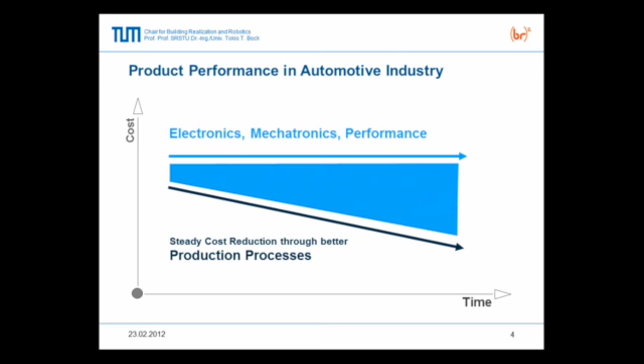The process thinking, I think, is very important, because normally architects and designers mostly have a product thinking. Sometimes we leave the process up to the civil engineers, the construction managers, or to the industry, which is not good in a way. But I think now we have chances to take the whole kind of total approach back, like the former master builders, maybe because of this new technology available.

And this input, I think, is very important to do the design work. So I have some kind of reverse engineering approach, looking at the end and then trying to design the product.

Tomorrow I'm going to show a little bit more about this production technologies. Now, because of the actual problems we have—not so much in the States, but in European societies, East and West Europe, and also some Asian societies like Korea and Japan—we are aging quite fast. So I think the process thinking might get into the building by itself. Maybe you know the movie Transformers, so maybe the building becomes like a transformer in the future.

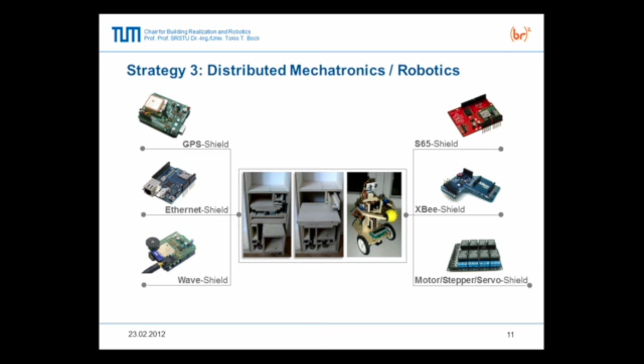So actually here also this thick wall has everything inbuilt. It has a toilet inbuilt, a cooking place inbuilt, a shower inbuilt, a refrigerator inbuilt, and it all slides out whenever you need it.

And I think in the future, what we are teaching our students in Munich is the traditional building structure, all the services, the appliances, the envelopes, and so on. And I think in the future we have to teach more about other systems which become active subsystems, like mechatronic systems, microelectronics, and microsystem technology, and these ubiquitous technologies which can permeate into the building.

But nobody is actually teaching it, or I'm not aware of courses, so we are trying to teach it now in our master's course.

What else is important - I also got inspiration from the United States, from Taylor, and one of his partners was Christine Frederick. She did the same as Taylor did with the one best way - Taylor, the one who inspired Henry Ford, Winslow Taylor. The One Best Way was his famous book.

Christine Frederick was a partner of Taylor, and she applied his thinking to the kitchen. She analyzed all the kitchen work and rationalized or revolutionized the American kitchen. There was an Austrian woman who worked in Germany, came to New York and copied Christine Frederick's idea, brought it back to Frankfurt, Germany, and developed the Frankfurter kitchen.

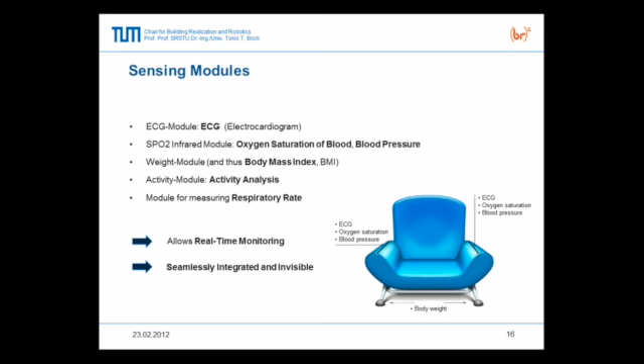It can give an alarm or some advice if something goes wrong. So while you're sitting on the chair, the data are measured. And why we chose chairs - because old people like to watch TV, they have their favorite chair, so we can put the sensors into the chair.

The next prototype addresses the problem that they shouldn't sit too much, because then they get lazy, and the less old people move, the worse the problem. So I had this idea, inspired by the Transformers - called in Japanese Gundam or Gattai - to transform the chair into a kind of exercise machine.

So here you see you can do exercises. Then the chair will recommend that you should do some exercise now, don't become too lazy. And of course, everything is connected to get the data and send it to the doctor.

Also, this is pretty important for countryside places - I don't know the situation here in the States, but in Germany, in remote villages, there are not many medical personnel, and nobody wants to be a doctor, or physician, there.

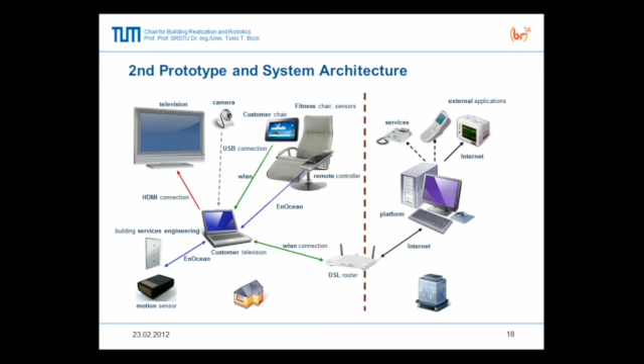Physician? Yeah, in the countryside, because it's not very attractive. If I live in Munich, walking from my apartment to the university, I can pass by all my dentists and optometrists, no problem. But when I go back to the countryside, where about 280 people live in a small village, I have to travel half an hour or more to find a hospital. So this could also be a solution for telemedicine in the future, connected to the internet.

And then, of course, we do real usability tests, not only with young people but also with old people. Here you see the first prototype of the chair that will transform into an exercise machine. First we're trying to do the rowing. We incorporated people from the medical faculty and the sports faculty to study the best ergonomic movements for the elderly, and they advise us how to do it.

Another project is together with Italians, where the problem is, of course, if you build a new building, you can already consider all these things. But the existing building stock does not have this technology. So we are developing a kind of modular system which you can transplant into existing buildings. It has to be very small, so you can bring it into even an old farmhouse and embed it into existing buildings or apartments.

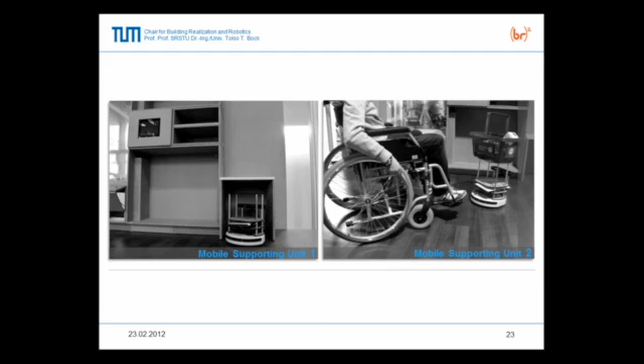Okay, here you see again some devices. This one travels out to help bring in the shopping bags. And this is the first prototype, here for one or two seats, whatever. This part flips out, helping you take off your boots. And all this technology, which you also find in some robotic devices, is now separated into this device, helping to communicate and so on.

Whatever you need, depending on your problem or physical challenge, it's a modular structure. Physically, or also the program, what this furniture can do for you can be extended or expanded. It can be adjusted to any kind of corner layout. We analyzed several hundred buildings and found a modular coordination where it can fit in and adjust to many existing buildings.

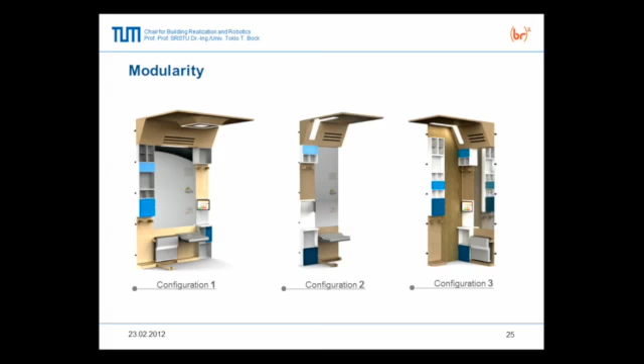Another project we are starting this year is about mobility. Mobility is a big problem, especially the interface. For example, we have devices where people can be lifted out from the bed, and they can move on to the toilet. But then at the interface is always the problem.

From this lifting device to the toilet or into the bathtub, or at the entrance shift over to the staircase lift, and things like this - always the interchange is the problem. Or when you are down there at the entrance of your apartment, how you get into the car, for example. All these interfaces are not solved, and here we're trying to solve it.

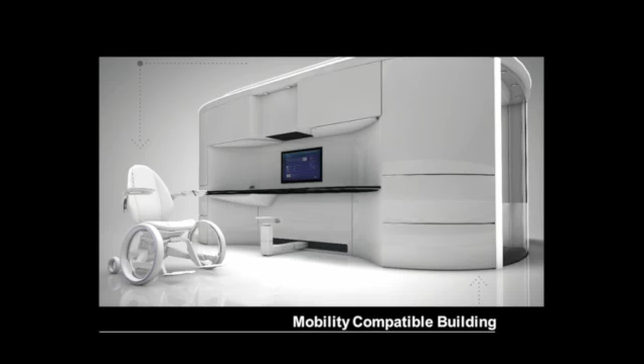Here you see the kitchen part and how you can shift over. You drive it in here, and you just slide over, and then you can use your kitchen, and this brings you to the right position, whether you need to wash dishes here or cook something here. Here you see it again on top, how this toilet works, like a motorcycle.

Yeah, I like this idea. We can discuss later.

So this is the company we are doing the new wheelchair together with. It's a company which also provides lots of devices and appliances for hospitals. It's important to have companies which have the competence, because if you develop something and show it to a medical doctor, they know exactly what company can do good products, and this is a major hospital equipment supplier.

Okay, and here we do the motion analysis. Again, time and motion - this is what Taylor did, you know, Taylor, Winslow and Christine Frederick. And now we do it for our apartments, to design for the independent lifestyle of elderly people.

Or here's some other development where we had some rails on the ceiling. Lots of accidents happen, for example, when old people get up at night and they don't find a light switch, and then they stumble and fall over. And then maybe if they live by themselves, after a couple of days you realize somebody is not moving in the apartment, you get in, and people are already dead.

So this device detects - of course, not with a camera, people don't want to be watched like Big Brother - but with infrared, and then it can show you the way where you want to go, and it can also help you get up. It's all suspended from the ceiling.

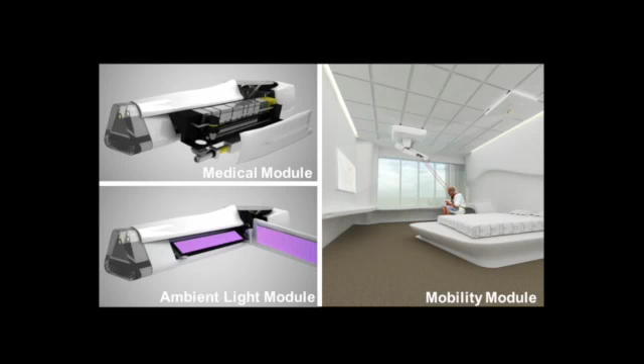Another project is a little bit more with typical industrial robot kinematics, but in this case it was the robot which had been developed for the Space Lab mission D2 in the 90s. It's a lightweight robot made out of carbon fiber, but a little bit expensive, about maybe $120,000. It's lightweight, so it only weighs 15 kilograms, and it can handle about 10 kilograms.

Because it's lightweight, you can put it anywhere on the furniture to help you in the kitchen. But actually, I think this kinematic is not so well suited for construction applications or building applications. But anyhow, we have this project with this company, so we do it.

And here you see what we are actually setting up now in our laboratory. This is a kind of testing device, modular. Everything is modular, so you can customize whatever the client needs or what really is demanded. So we can customize the kitchen, the bathroom, the toilet, the living room, the bedroom, whatsoever.

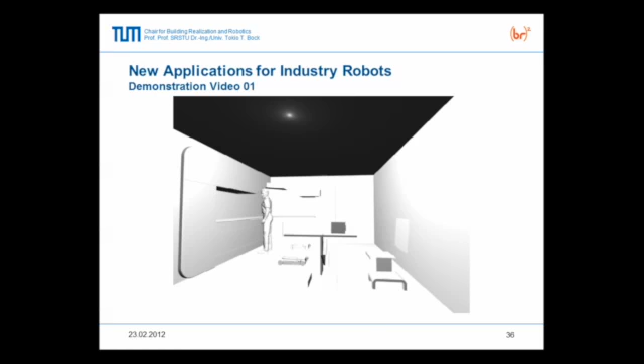Also, the setup, I can show you later, is not a typical construction industry setup. I used sections from mechanical engineering, so I can change the whole space in 3 dimensions.

Yeah, here in the back you see the kind of sections we are using. So I can attach here, theoretically, a linear drive, so I can make the wall perform something. And it's a raised floor - actually, I can do something from below.

We have one project where suddenly the things you need appear around you when you need it, or from the ceiling. So it's a very three-dimensionally changeable space.

Okay, and then the kitchen. Here we got some inspiration from McDonald's, because they're very, very good at how they organize their work - not about the food, but the systematic approach of how they do it. It's a little bit from aircraft as well.

I refer a lot to airplanes because I like airplanes, I'm sorry. So, you know, when they bring you the food on an airplane, everything is very compact - how they heat it up, how they serve it to you.

And this kind of notion, McDonald's notion, plus the business model of McDonald's, where we supply the person - because the problem is sometimes elderly people don't eat properly, they don't drink properly, they have the wrong minerals and vitamins. So everything will be supplied for them, just like what they need to have good nutrition value.

Okay, and then here this kitchen is changing as well, because it's always difficult if you sit in a wheelchair to move around in a wheelchair.

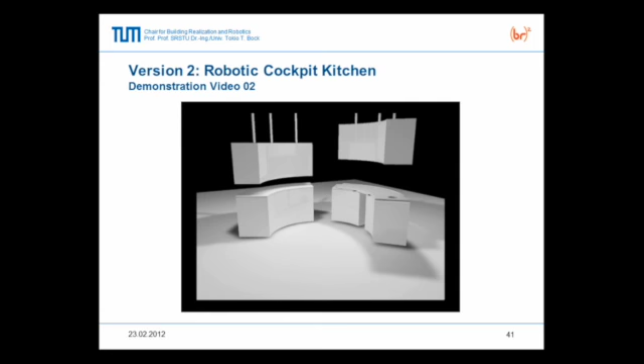So the furniture becomes, or later the whole building becomes like a transformer, in my opinion.

This would also be good because the investment in construction building is very high. In Germany, every second euro goes into the built environment, including infrastructure. This means huge investment, and I think in the future we have to deal differently. We cannot scrap and build. We have to find different solutions.

This is the one I said where we took some ideas from the aircraft. It's not rectangular like in the airplanes, because I thought it's kind of interesting to have this round kitchen as an island solution, and the other one I showed you before, you got into this round solution. So we're trying all different kinds of solutions.

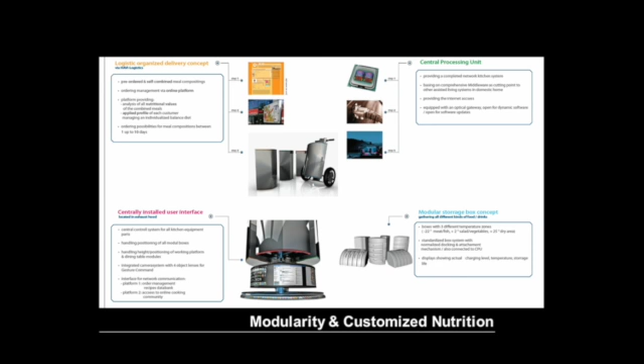Okay, so I think I'm almost through. This is the one inspired by Christine Frederick, and this is what we are trying to do today. The idea is to have these customized services and environment, whatever the people need, whether it's to allow their independent lifestyle. Okay, thank you very much.

Thank you, Thomas, for this preview of aging. I already feel a little bit better about the prospects. But I think there'll be lots of questions. It brings up so many associations, building as a machine, human-centered design, many issues. We'll leave questions to the end. I also want to mention that tomorrow from noon to 1 there'll be another presentation by Thomas Bock about the work in construction automation, the prefabrication of components, and the construction automation systems for high-rise buildings. That'll be in room 124.

So let me introduce our next speaker. She's Rivka Oxman, associate professor at the Technion at Haifa, Israel, where she received a bachelor, a master, and a doctoral degree. Her work explores models of design thinking and design computation from a conceptual and theoretical perspective. She promotes design and design practice as a form of research. Her work has been published extensively in both scientific and other journals, and she's given keynotes at venues such as SIGRADI, CAAD Futures, CAADRIA, etc. Rivka Oxman is a fellow of the Design Research Society, and recently co-authored the architectural design issue entitled 'The New Structuralism: Design, Engineering and Architectural Technologies.' This year, she is a visiting scholar at the GSD, working on new projects. Please welcome Rivka Oxman.

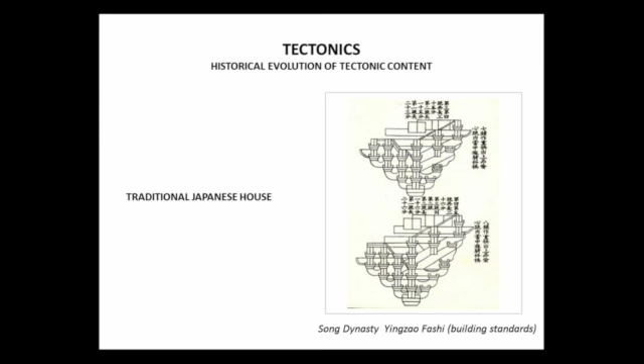In historical periods, advanced construction tradition encompasses the structural system, building standards, and the construction processes which are closely integrated. The material systems are gradually transformed into formal systems that directly express both the material origin and the construction process.

Frank Gehry's Bilbao is considered to be an early digital tectonics. In the early digital age, in buildings such as Guggenheim Bilbao, the fundamental methodological difference is that the shapes were produced as individual forms and lacked, at the beginning, an inner integrated link with either structure or material. The link became stronger later.

Gaudi's work is considered a canonic example which introduced experimental analogical methods of form finding in design. You can consider that as an early informed tectonics.

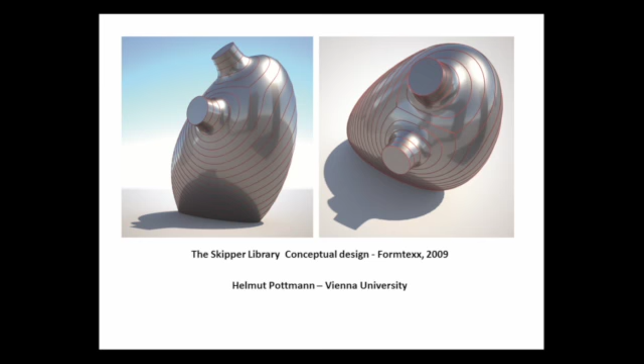The Skipper library conceptual design was done by Formtexx in 2009. In this project, Helmut Pottmann from Vienna developed a construction-aware digital design environment that incorporates knowledge of the material used, panel types, and panel geometry options. This way, it kept the information flow along the project development.

Helmut Pottmann is currently developing rationalization techniques to support informed processes, providing construction-aware design tools and enabling a completely digital workflow from design conception to manufacturing.

I believe he worked with Zaha Hadid on the funicular station in Austria, where Bollinger and Grohmann, design to production, were doing the construction and the fabrication.

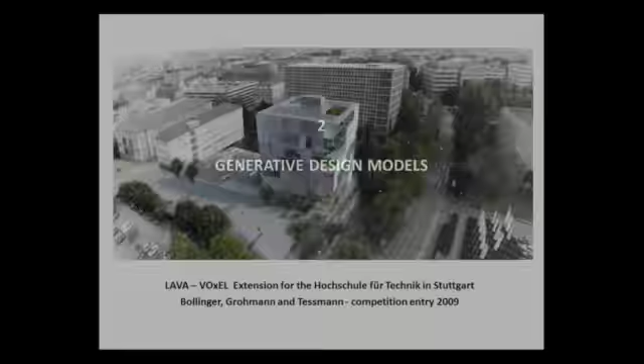The second principle is getting the flow by using a computational, in this case generative evolutionary, design model. The Lava voxel extension project by Klaus Bollinger, Manfred Grohmann, and Oliver Tessmann illustrates both the structural and formal principles in the conceptual model of square-edge sponge configuration.

The project is based on a 3-dimensional spatial continuum that provides close interlocking of the same elements for spatial and structural organization. The interdependency between shape and structure is maintained by using an element which shares the formal expression and the structural attributes.

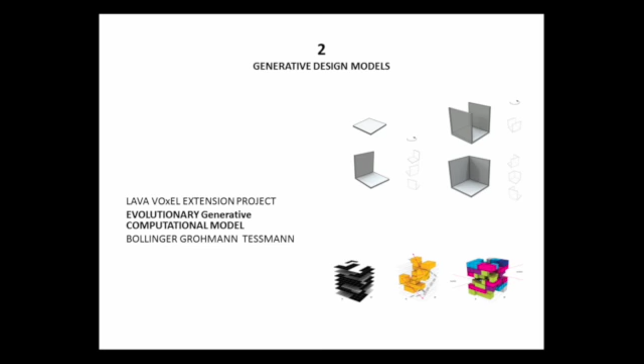The system properties are not defined by individual elements. They emerge from an intricately informed generative evolutionary model without any top-down control. The interdependency between sets of elements is hardly predicted in this case. The structural performance of the configurations becomes the fitness criteria in this evolutionary process.

The third example, the third model, is related to information flow achieved from design to code and manufacturing. And here you're probably quite aware of the work done in your own institute.

By Professor Martin Bechthold, in which robotic bending work of individual metal components, by Martin Bechthold, GSD Harvard University, and his students, illustrates the role of directed information flow from design model to code generator to robotic manipulation. Both design and robotic fabrication systems are informed in a bottom-up fashion by local processes and control.

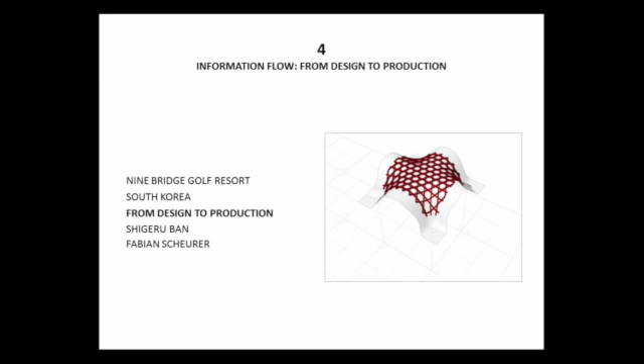In this project, woven timber girders represent craft-like tectonics. The canopy was composed of woven timber girder elements assembled from detailed 3,500 glue-lam intricate prefabrication segments. Intersecting girders were fabricated by CNC machine, as you see here, ready for production.

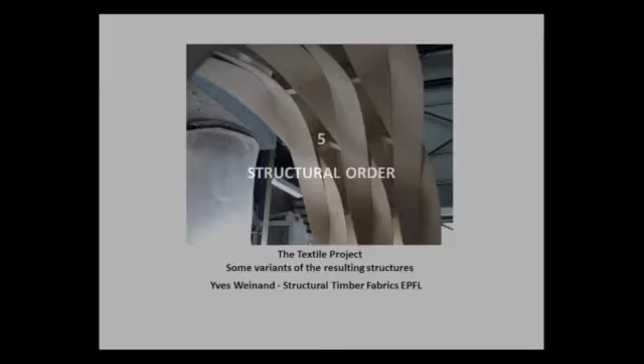The fifth concept is the selecting of structural order. Construction demonstrates an interdisciplinary approach in which material first informs the structure and the form. So in this project, instead of working form, structure, material, the work started with material, which then produced an emergence principle of structure, which creates the form. This is seen in the work of Yves Weinand from EPFL Lausanne, termed the textile module, applying textile principles to the context of timber.

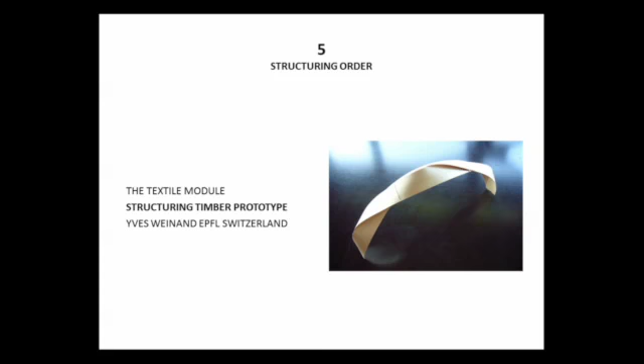By twisting a material component, in this case a timber sheet, into a stiffened structural component form, a structural principle emerges. So here we get a structural principle which is not usually demonstrated by timber. The component is then assembled into a fabric-like woven structure.

The sixth concept, the sixth model, talks about digital materiality. I guess all of you know these people, Gramazio and Kohler from ETH. In the following case studies, bricks that have geometrical attributes and constructional logic are encoded digitally as a particular material system.

Formulating and scripting the logic of a design system as the interaction between human and robotic machine, including the geometric form, the structural elements of material components, and their assembly logic, in a single mode of design, becomes the basis for the definition of digital materiality.

Digital design code of complex material instructions can now drive design production in robotic bricklaying. I just heard they are moving now to another material, a timber material, and we'll see what's going on.

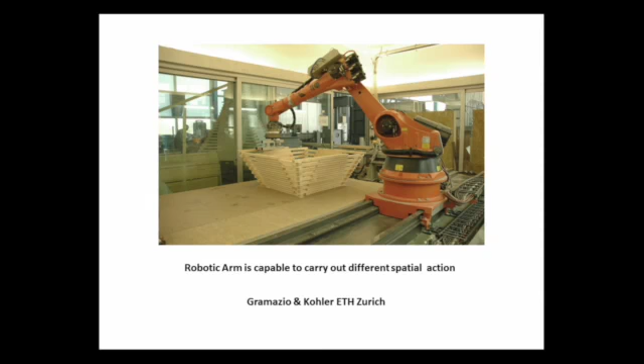Digital materiality, as defined by them, is informed tectonics via robotic technology, encoding the geometry of material components and their assembling logic. Informed tectonics through coded variations in experimentation with digital tectonic systems produces an infinite range of experimentations.

The last principle, last but not least, is the concept of digital material and variable properties—the digital material variable property model. In this model, variable properties of digital material are informed by performance attributes of a specific context, human or environmental. Digital material is computed and fabricated according to desired properties.

Some examples: the Beast prototype for a chaise lounge, exhibited in the Boston Museum of Science, demonstrates how variable properties of digital material can be informed by specific context. In this case, the distribution of structural fitness and distribution of the body produce the desired properties.

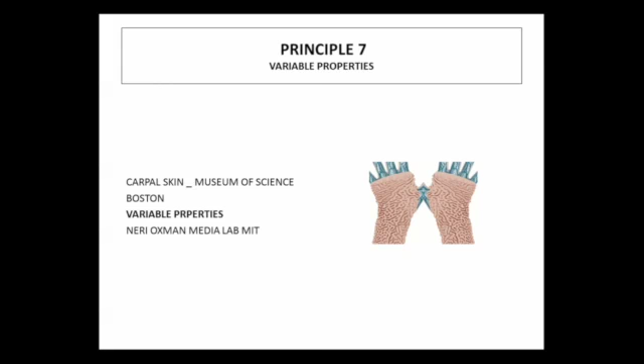Again, variable properties of digital material are informed by structural loading and the distribution of structural stiffness in the work of Neri Oxman, presented here. In this case, properties of the shape and stiffness distribution are informed by a pain map.

To summarize and conclude: today, the convergence of design, engineering, and architectural technology is breeding new material practice in experimental architecture. The term 'informed tectonics' was proposed here to represent design technology as an agent of change, looking at this shift as a synthesis of conceptual principles of spatial, structural, and material ordering integrated within the logic of materialization and the rationale of fabrication and manufacturing technologies, as a holistic model of design.

I think this field is very exciting. It changes the way we think and perceive design, and I believe it will grow from the small scale of product design and buildings, and will lead to a different and refreshed way to deal with problems in urban design and other big-scale design.

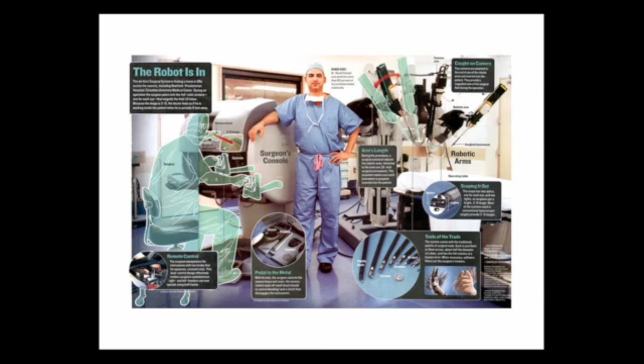I've titled this the AR Lab, and I wrote an essay not too long ago, having talked to an architect colleague of mine in New York, who said, 'Paul, I recently visited Yale, and I was very impressed with the facilities they have there—the students have access to all of these new technologies, new robotic equipment and CNC machines. And there's a real problem I see, in that these students almost are being trained as though they were, as an analogy, medical students given the latest technologies, but when they get back into actual practice, it's as if they went from this very high technology and they're given a hand drill from Home Depot.' So there's this real chasm between what's being taught in academia and what professionals are being given in actual practice. And this is a real concern of mine.

So I wrote this essay called the AR Lab, the Applied Research Lab. The premise of this essay is basically to say, how can we bridge this chasm between academia and those in practice today? I work with the AIA in New York, and I'm also now working with the AIA in Philadelphia. To be very honest with you, I'm not so enamored with the AIA as a change agent for technology—I shouldn't say that too loud because it's being recorded. But how do we bridge this?

How do we get practitioners to use this technology who don't have access to what you have in academia? And how do we bridge your transition from this wonderful world of academia into a practice where you're not disappointed, where you're not let down, where you feel that you can show those in practice what you've learned and what you're doing. So there's a very practical side to this.

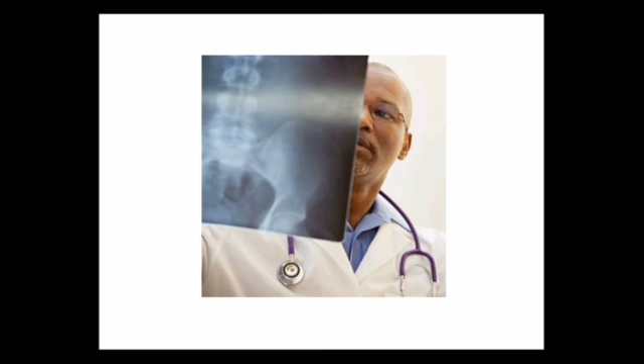So I like to think of architecture and architects as analogous in their importance to the profession of medical research and medicine itself. And I look at the surgeon or the medical practitioner and I think, well, what distinguishes the medical practitioner? It's not purely looking at a film and saying, this is the problem. It's a series of taking conditions, examining conditions and studying conditions, and then coming up not with one answer, but with a series of options, with a series of interpretations.

So we look at conditions as architects very similarly. We like to know what is the given problem, what are the given conditions, and how do we synthesize this into not just one option, but many options.

And so we have the technology that enables us in many ways to monitor what's going on. But the problem is that we're monitoring this in a post-rational manner. We're coming up with designs, we're coming up with morphology, and we're using the technology post-rationally, post-morphologically, to sustain or to validate what we've designed. It's not embedded within the design process itself.

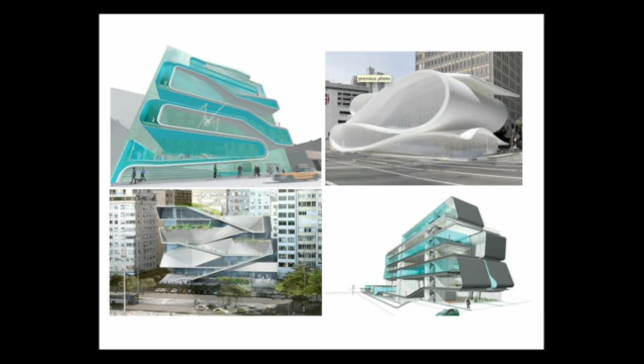Now, I'm not suggesting that we shouldn't have our heroes and we shouldn't have our authors or our auteurs, but this is a series of slides that I call separated at birth. A lot of what you see is in some ways mimicking the digital technologies, in some ways trying to epitomize the digital age. But there's an issue here, and I'll get to that as I go through these slides. So I'm not going to name names. This is by no means to denigrate these architects or their ambitions or their ideas, but it's to say that we need to go beyond what we're using the digital technology in terms of formal production.

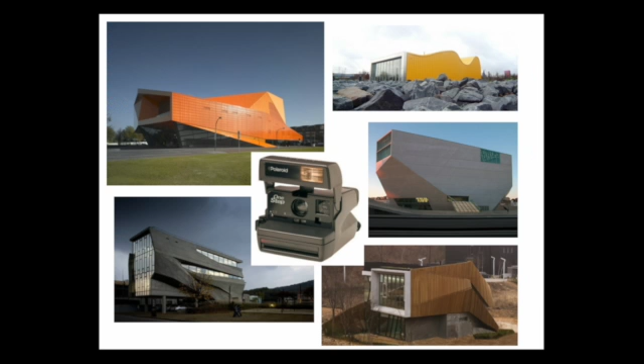So you can see here there are a variety of themes that have been generated digitally and produced digitally, and some of them are evolved from the Polaroid, and some go into an expression structurally of what exists. I certainly love what Rivka has presented as an informed, intelligent approach toward structural representation and towards structural expression. But we start to see examples of some, I can't say mimicking, but where a theme is developed and it's taken and becomes a kind of fad in some ways. We even see it in examples of the software technology companies and how they're recognizing this. But again, all of this goes toward a question of when do we begin to embed the technology into the design process itself.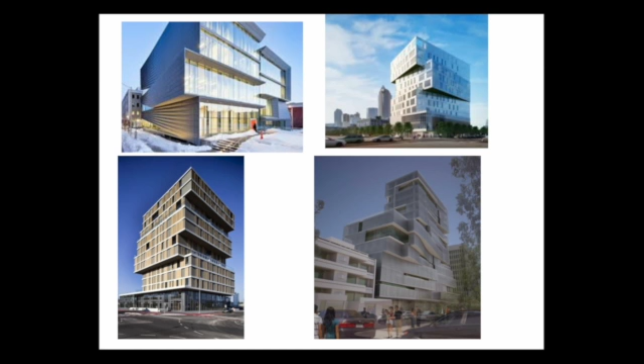And I think it's notable that Rivka, for example, has presented Gaudi and Mark Burry's examination of Gaudi, because well before the computer was brought into existence, it's clear that Gaudí had the parametric mind to understand structural integrity and structural expression, and didn't necessarily need the computer to see this. So where does the computer help us to augment some of these ideas? And especially in practice, where do we start to examine how the computer is not an answering machine, but is a means toward creating more options in less time and starting to communicate with clients in a different way than we're used to?

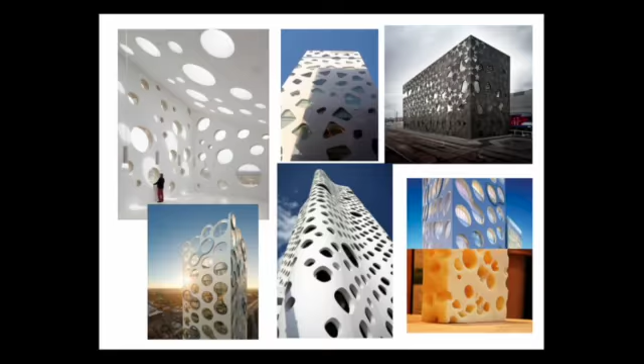A lot of the difficulties, for example with building information modeling, are starting to overturn the nature of our labor and what we produce in terms of our labor, both in the early stages of conceptual design as well as in the production of our documentation. I'm going to get into that in a second or two.

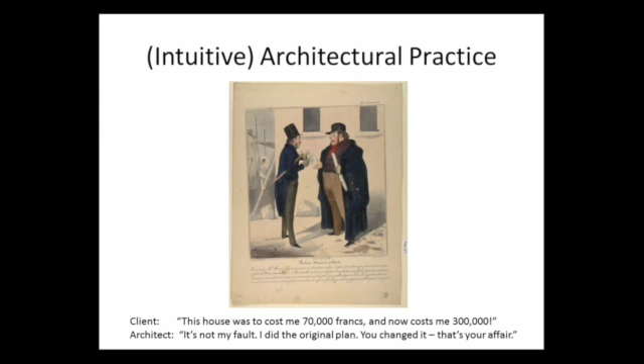But we can look at this from over a century ago, two centuries ago, and say, well, what has really changed? We're not really allowed to talk about costs, we're not really allowed to talk about means and methods, we're very afraid of our risks and our liabilities. So in terms of all the technology and our empowerment as a profession, we've really gained very little.

And so we are faced with certain situations where we're questioned in terms of our stated claims to energy performance. We have advances in other areas of neurological science and research, how we perceive things, what makes us comfortable supposedly in certain spaces, what makes us uncomfortable in certain spaces, but we don't really have a means to incorporate this into our design methodologies.

We don't have any means to simultaneously take what we're shaping and what we're looking at formally and gain any feedback, as we might on an automobile dashboard, as to how fast we're going, how quickly the engine is changing its rotation, how much fuel we have left in the gas tank. We don't have any means to simultaneously look at this in terms of our design methodology.

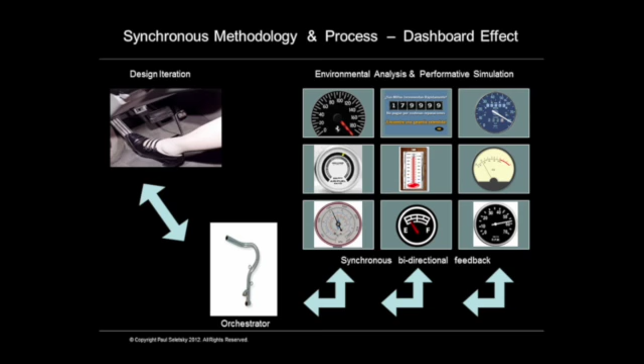We have very much an asynchronous, sequential design methodology, which again says let's come up with the shape, let's come up with the form, and then let's apply all of these engineering properties to see if the building can withstand the conditions, rather than saying maybe these conditions can inform our design morphology. So we have our idealism versus the reality, and the reality is this.

We haven't perhaps studied the industrialization of the big box stores and how they're changing the landscape and impacting our environment and shopping methods. The Apple Store is the most profitable retail venture in the world, and Steve Jobs was very reluctant to create it. But he did, and they moved forward with it.

Does it really talk about our design methodology? No, it really talks about the idea of selling one's products within a given environment and tailoring that environment toward those specific products.

Now, what things will change our way of thinking? What's happening? So we have cloud technology that we're talking about. I have an iPad. In today's New York Times, David Pogue writes about this new software company called OnLive, which is essentially streaming a Windows desktop to your iPad.

So the notion of having a singular computer at your desk will probably in 10 years be tossed by the wayside, and we'll have ubiquitous mobile devices everywhere, more computing power than we could possibly imagine through the cloud, if we use this properly, to design and to start to look at the integration of design morphology and design analysis in a simultaneous rather than a sequential manner.

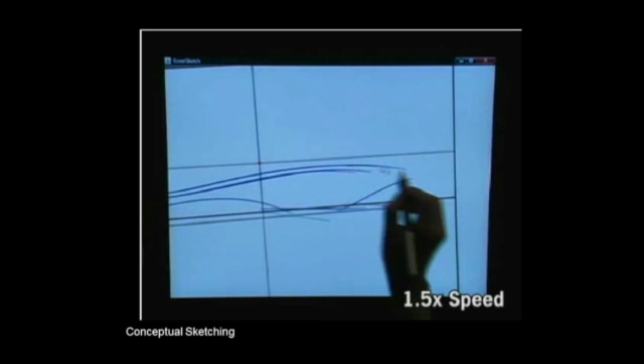I show this as an example of the chasm between those in practice and those in academia. This was developed a few years ago. It's antiquated technology, but it's mimicking what we want to do in terms of tactile feedback with regards to the pencil. There was a symposium at Yale that I believe just ended yesterday or today that we might talk about, but the whole loss of the tactile relationship between hand and eye coordination.

We're lamenting this loss, we're questioning it, and yet we haven't really talked about how the computer or digital technology can augment the way we think and the way we like to practice.

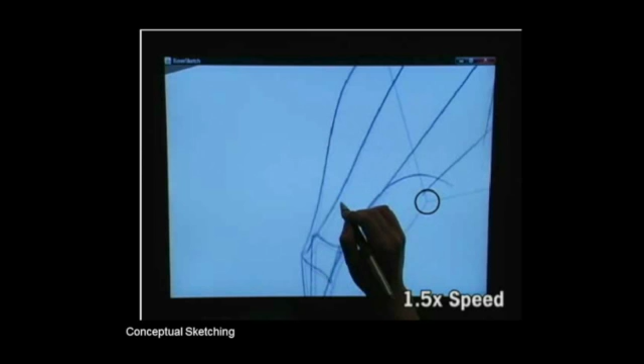In something similar to this, I will also argue there are several areas that we as a profession have not had serious discussions about. I'm not necessarily interested in a symposium on the loss of using the pencil as much as I am interested in talking about how we're going to publish our work. I believe we have a serious problem in terms of multimedia digital publication that the newspaper industries and the music industries have already faced or currently are facing, and we haven't even begun to have these discussions yet.

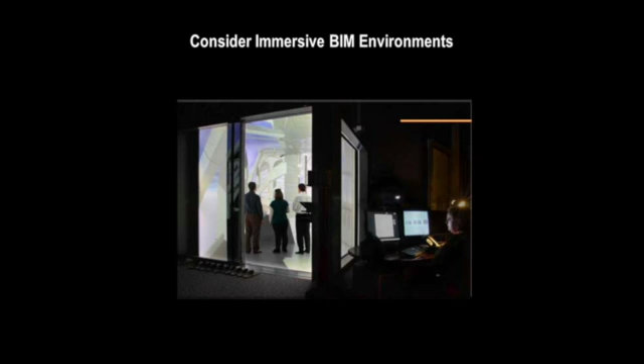We have very few tools that really start to do this. We talk of immersive environments, but here again, the immersive environments are quite expensive. Most practices cannot afford them, even an SOM or similarly large firms. So where do we begin to look at what we're designing and simulating what we're designing through the technology?

This is one video, if we could play this now.

So the idea of the tactile large screen where we can start to experiment not just with images but with text, with specifications, with a whole range of ideas.

As I mentioned, OnLive has this Microsoft emulation. Microsoft has also incorporated their touch screen into this technology. So I now have a touch surface that can do this on my iPad. This was produced by Jeff Han at NYU a number of years ago. It was shown at a TED conference to great acclaim. But if you go into any office these days, you're very unlikely to see any of this happening within the largest practices.

So the question is, is it necessary? Why don't we have it? What are we really doing with the technology? I would argue to a great extent we're doing BIM 1.0, which is basically, in terms equivalent to the automobile industry, like Henry Ford painting a horse on the Model T and saying this is what everyone wants because they're really familiar with the horse.

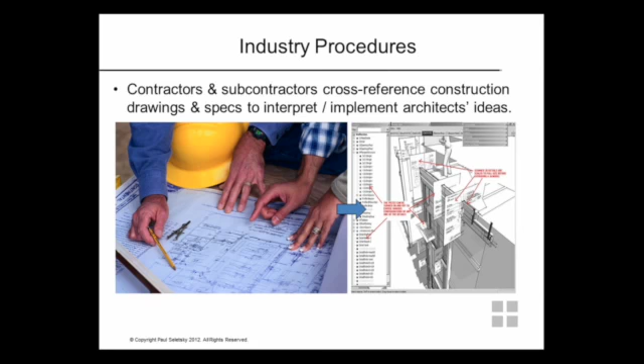Here is an example of what we do in the field, and someone's idea of how we might be able to do it better, in terms of dynamic sections which are linked to specs, the miscommunication of paper, the billions of dollars that we waste going from our bid sets to actual construction.

The fact is that we can create as embellished or as intricate a BIM model as we want, but we don't take it into an as-built form. We're relying on someone else, namely the CM, to do that, or we're demanding this as an additional service, as we rightly should, but we're very reluctant to create the as-built model from what we actually build.

We have the stacked paper effect. Here is an example of BIM 1.0.

And we're not even looking at the simplest of technologies that we take for granted today. I can track where my shoes are that I've ordered from Amazon.com, but I have no idea where my building components are relative to the project.

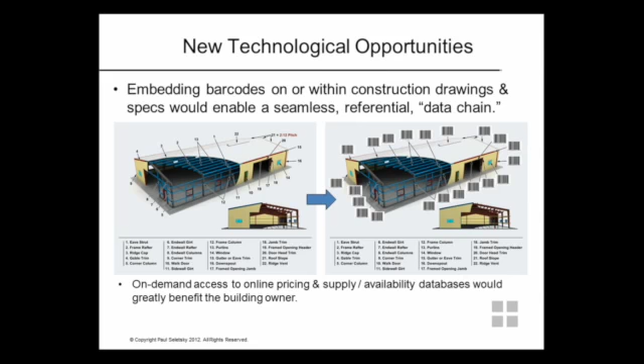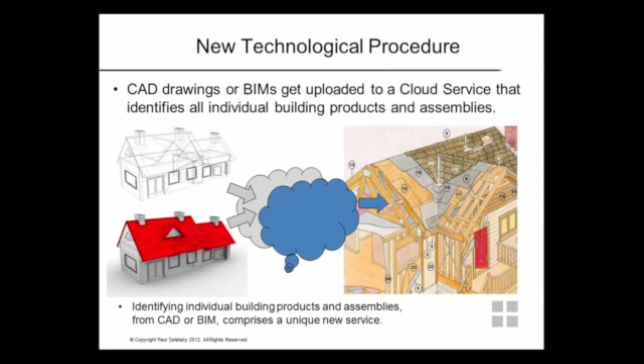So we have potential systems that could start to incorporate nomenclature and technology, but we're not really utilizing them. We certainly are labeling all of our building products with some of this technology, but we're not incorporating it into a multimedia effect. And we can certainly look at some of this on iPads, but we're not really thinking in terms of true multimedia and what that might mean for us in terms of our communications, both with our consultants and with our clients.

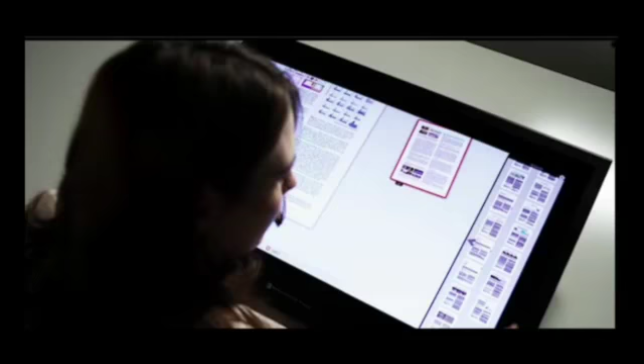And if we can look at this, this is basically saying, let's rethink our paper documents in a purely electronic form. Might this be what we present and give to our clients? Might we give them this digital model that's incorporating all this information and saying, you're going to have this as your owner's manual. You're going to use this for the lifetime of your building, whether it's your house, your apartment, or your commercial building.

Social networking. I'd like to see the day when these light bulbs are tweeting me through my building information model on my iPad or my iPhone and saying, hey, I'm getting burned out, I need to be changed. Just like the elderly want to communicate with those around them, but not really bother them too much, to say, I can do this on my own, but I need some assistance. Our components should start to talk to us and tell us what's going on.

Now, we learn certain things through our own experiences and how disconnected we are and how we refuse to talk to other parties that are involved in our work.

So I recently moved to Philadelphia with my family. And I'll tell you something, as you get older, it's good to make changes that you wouldn't normally make at a particular age. So hopefully when you get in your 50s, quit your job, move to another city, and experience this, because you have a certain level of comfort with things that you take for granted. And it's good to challenge yourself on these things.

But you learn certain things. And I learned that going through all of these realtor websites in terms of selling my house and buying a new house, that I could look through all of these properties, and my wife and I became detectives in going through all of these photographs. And certainly there are the little pics and 3D navigations where you can go through the photographs.

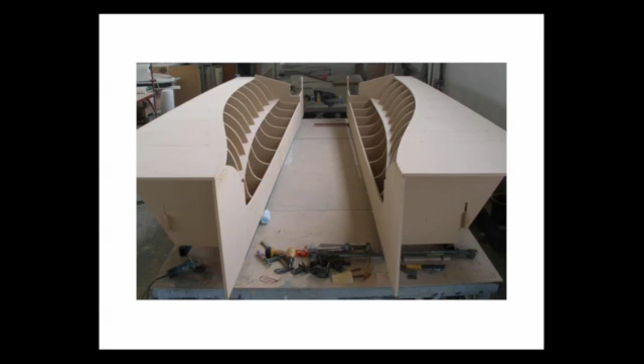So we can talk all we want about CNC machines, and now we can even buy them for $500 or less and put them in our home. But even if you're designing a coat hanger and give it to all your friends, and a week later the coat hangers start breaking, your friends will ask, why didn't you do the finite element analysis of this coat rack? Didn't you know the form you created should have structural integrity? So I definitely describe, in terms of what Rivka is suggesting, that engineering is, in many ways, the new architecture. We're going to be faced with this.

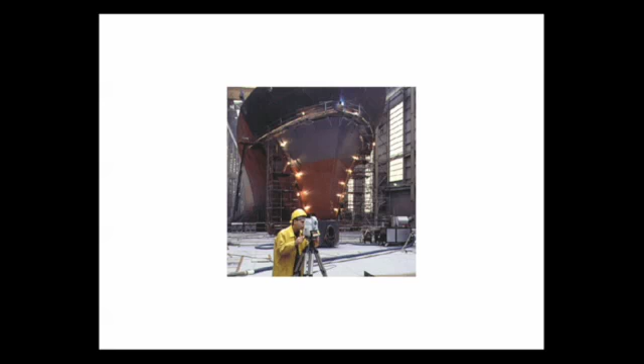So create all the beautiful patterns you want, by all means, and emulate this to life scale. I think this is the second area of contention: what will happen when we decide to produce and fabricate all of this at full scale? What recourse do we have to say, legally, this is what we want to do and we stand by it? Or who will stand by us? In shipbuilding this is a given. Shouldn't it be that way for us?

Rather than creating geometry with no behavioral characteristics, like the Frankenstein model, we want our buildings to think. We want our buildings to be as aesthetically interesting as we make them, not 1950s tail fins, and to communicate with us. If we don't, we're liable to create very badly designed buildings that construction managers will applaud: we got this through BIM, we had zero change orders, but it's really a crummy designed building and looks it.

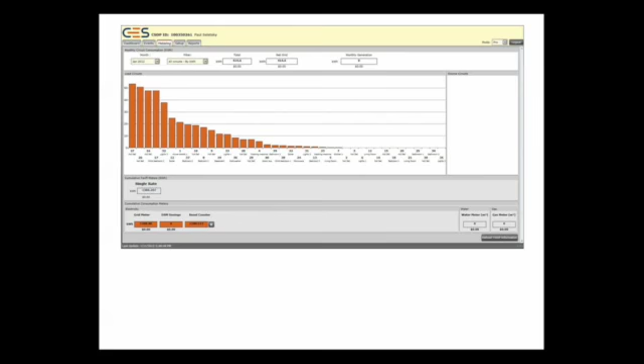This is a digital circuit breaker panel in the basement of my home. I thought I might as well put my money where my mouth is and show you: here's the computer screen that controls 8 of these circuits, and I can turn them on and off at will from anywhere I am. Why might this not give me the readout of electrical usage, and why might it not be tied to a building information model, so that I'm seeing virtually what I would see in this model if I were a medical researcher or a surgeon? I might see the same thing in my building.

We don't think about security, but security is another area that is a whole industry that could tie into what we do. Have we examined first responder status through these building information models? Are they giving us the ability to practice fire drills and safety drills and real-time actions through these models? And again, there's elder care, as Thomas has so eloquently shown us.

What do we provide as architects between the tacit knowledge, which is our experience designing buildings, our experience going through life and trying to incorporate that into our aesthetics, versus explicit knowledge, which is that which is codified? We have very few central sources of codified knowledge. I'm not suggesting that computers provide these as optimized structures or optimized answers, but that we look at both sides of this equation and all of the areas that we really need to have integrated into our design methodology. And BIM is a very small component of that. It's not the preeminent component. It's what's here and what we can augment through the computer.

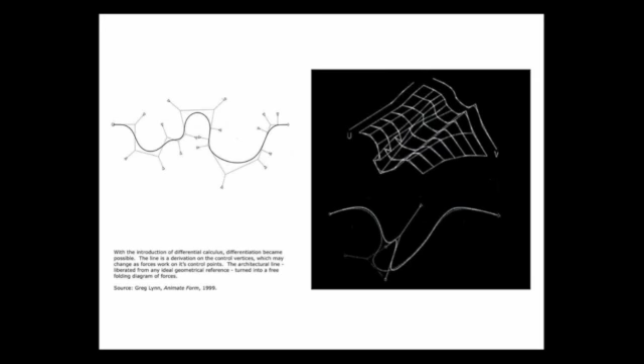Now, replacing the notion of a determinate, substantial object entity through object versions, through relational constructs, versioning offers an alternative perspective on objecthood. While unversioned objects may be considered objects that merely occur in a single state, namely the current, the present state, which becomes overwritten as it is modified, each version presents a state of an evolving item put under version control.

Versions may therefore be performed as revisions, superseding their predecessors, or as variants, coexisting with their predecessors and antecessors. Each revision or variant, a snapshot of an instant in the evolution of the object, is constrained within the versioned object. Each revision or variant becomes solely identifiable in and through its complex relations to all other revisions. Links and relationships record the predecessors and successors as they permutate and hence constitute the object differently each time.

This process is documented in the revision history, an archive of past revisions that record the work's evolution over time.

Identity evolves and dissolves like a diffuse network that continuously transforms and therefore becomes rather than exists through the profound play of differences and repetition.

Within this restless process of becoming differentiated, which we will examine more closely in the following, the object's versions occur merely as temporal stabilizations, hence dismissing both the former belief in an ontological permanence and static architecture. Instead, versioning opens an alternative perspective onto repetition and difference, rendering representation in the sense of the repetition of the same problematic.

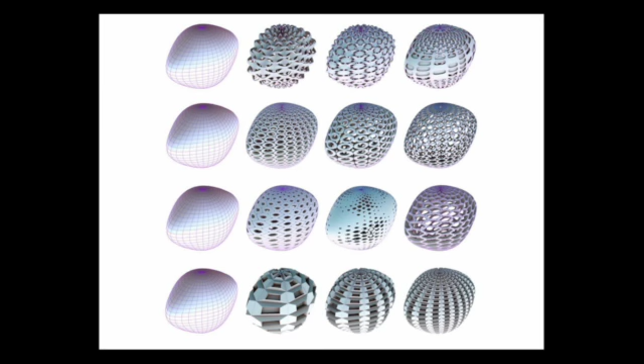So I would argue that we here are doing nothing but heightening, fetishizing the idea of differentiation and kind of reducing it hereby to a mere surface effect.

At best symbolizing rather than taking advantage of the computer's power, the tireless looping, its ability to perform millions of operations in a single second and to constantly shift and recalculate functions.

It is not just the curve which began to characterize computed form, but the parametrized curve, the folding and shifting of the two-dimensional curve across a third dimension. Not even the curve alone, but also its derivatives and inflection points, the core of calculus-based mathematical analysis, is that which began to inform digital form-making at its deeper level.

Architecture is viewed neither as fragmented nor contradictory, but rather as an integrative, intensive whole. With computer-controlled manufacturing techniques, infinitesimal variations, and one-of-a-kind customized variety, as Lynn was talking about in 1999, became possible.

But was the possible also plausible? Many of the results were often grotesquely dysfunctional, uninhabitable, continuously differentiating surfaces, which were at best rigorously generated.

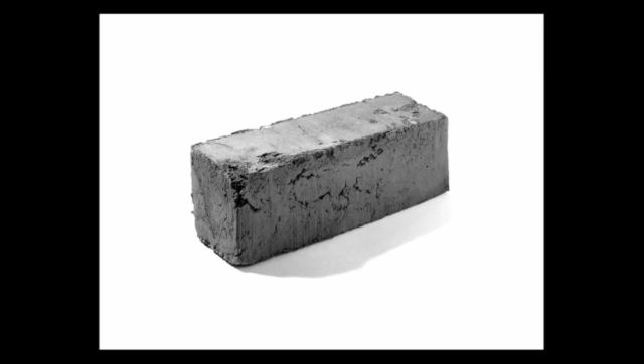This is our object of interest. And I believe that the brick is on the brink simply because the brick stands for, on one hand, first a handmade, man-made object, which then became aggregated, and then second became increasingly more mechanized in the vein of industrializing the production of bricks. And finally, I think we arrived at a third stage where we could say now, in the vein of computation, the brick and its qualities have once again dramatically shifted.

So I'm going to shorten this a little bit in the interest of time, right, Martin? What do you think?

So here, obviously, we see first productions of brick, how they were traditionally made, essentially just earth rammed into a form. The result is a rather irregular type of wall.

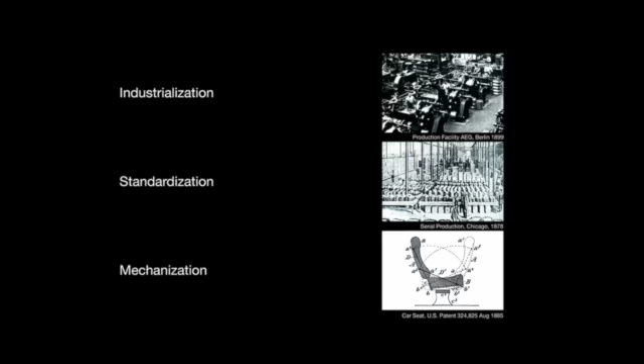Then industrialization arrives. We see the standardization, mechanization. The brick becomes standardized, normatized, engineered. Also engineered and normatized are the ideas of how walls had to be measured, dimensions are fixed, bond systems are defined, techniques of building the wall are defined.

Still rather crude, and yet still we're working here with an industrialized material. Now a shift from mechanization to computation. We have a mass customization of the placement.

This is an image from here, but it's also analogous to what Gramazio and Kohler have done at ETH Zurich. Mass customization, meaning the relationship of the bricks to one another can be customized, whereas the brick itself remains a module. We could also think of the brick itself being versioned, changing, as here in this case the work by Greg Lynn in the middle suggests.

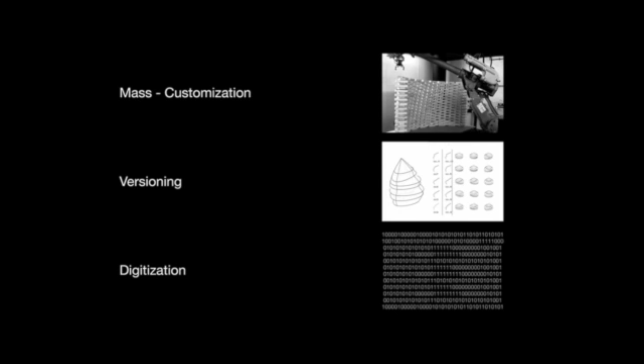And then finally, this is all based obviously on the digitization or the use of computation, as already was suggested earlier today. So now our first exploration: mass customization of the brick.

This is a work we have done in 2009 here at the GSD. The research focused on two primary explorations. The first was to develop a method in which the geometry of the brick itself allowed for curvature in a surface, rather than using mortar or air gaps to achieve curvature.

The second was to find a brick that had its own identity, resisting subjugation to a surface, even as it changed to form that surface.

Now here we see, first of all, we just take a principal dome. We use techniques of projection to define and discretize that surface. This is a re-understanding of the brick, not just as a massive module, but along its sides, understanding each side essentially as a malleable surface.

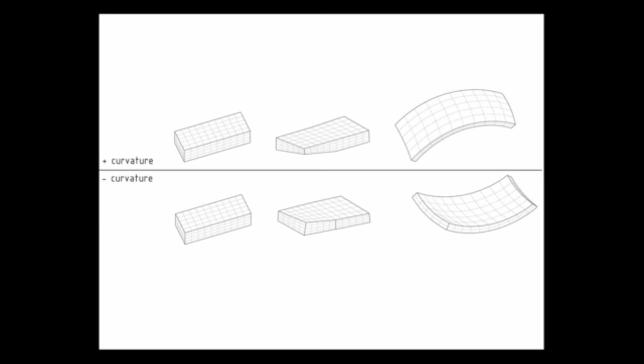Here we can see questions of curvature. So what will be curved is a brick, if a brick constitutes a curved surface. Is it the brick overall curving, or are certain parts of the brick curving? Then here we have this kind of discussion: are the sides curving that touch the brick?

What are the techniques of fabrication we have? We have, in this case, used the water jet available here, and we actually used existing bricks, which we cut in order to achieve this curved surface. And then another question is, how would the brick yet remain a single unit, still legible? And how far would it not be subsumed totally smooth into the surface?

So we were building a model within which you can see the bricks being aggregated hypothetically right now here without any gap in between them. So each of the bricks obviously has to immediately relate to the neighbors, and you see in how far different relationships are explored.

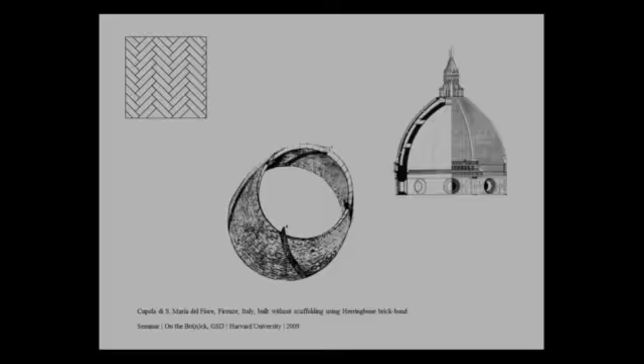Then we looked also at classical samples, such as here the dome we have seen already today. We were particularly interested in the herringbone as a technique of assembling or aggregating the brick, because it seems suitable in order to avoid scaffolding.

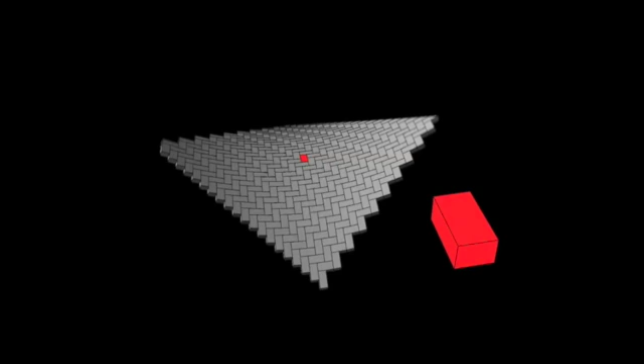And here we have an analysis. Again, you can watch the brick on the right side, this is the red one, which is highlighted within the field. And what we're doing here is indicating the degree of curvature as we change the curvature of the overall surface.

The idea hereby was that the top surfaces of the brick would not change, whereas the sides would be curved, and obviously that was limited to the capacity of the water cutting, because the beam of the water could only achieve certain degrees of curvature.

So in the end, we were also looking at software which could allow us to arrive at a proper structural system for this exploration.

We were looking at some freely available software by Axel Kilian in this case, which is simulating a catenary system. The surplus of this is that, as we have seen already from the actual hanging model, this is the inversion of it.

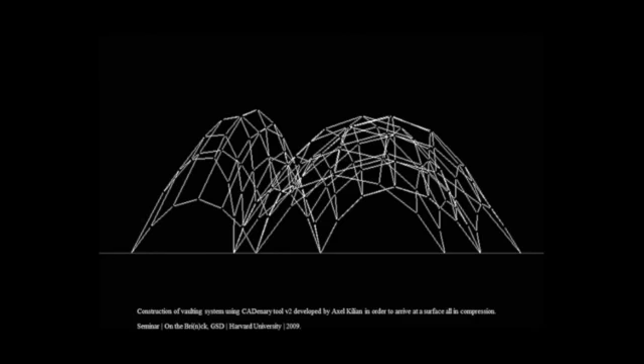But since the hanging model is all in tension, the moment you turn it upside down, everything is in compression, which is extremely handy, particularly if you want to build out of brick, ideally with no mortar or anything else gluing it together. So that was obviously a hypothetical; nevertheless, we went through a couple of formal explorations and came back having defined a form.

Then the question was, in how far would we then properly populate it with the bricks? We used for this purpose Grasshopper, which is not ideal, but is highly intuitive and very quick in order to get the job done, which was necessary for us here.

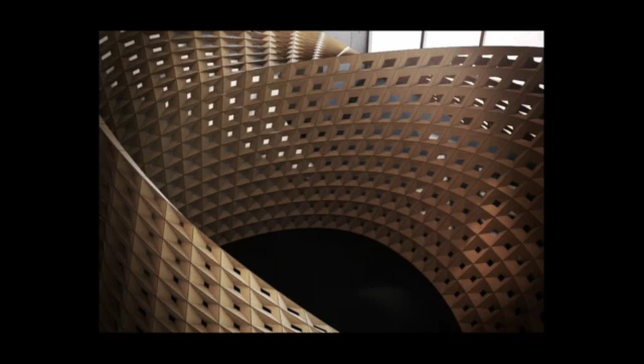The next project is one we were interested in, again looking at parts-to-whole relationships. This time we wanted to customize the brick as much as the opening of it. Those are cardboard bricks — we wanted to purposefully shift material because the heaviness of actual bricks was really not helpful for us to fabricate here. Plus, we liked the challenge of recycling it easily, and working from a two-dimensional material into a three-dimensional quality.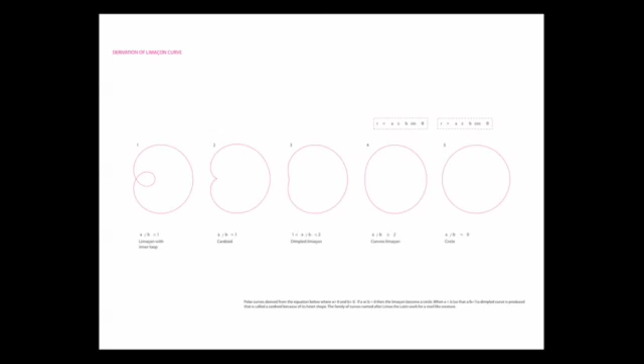You can see as you change the equation, the characteristics of the surface change. In the end, we chose this configuration where the surface was lifting up so you can slip into this type of pavilion we worked on here.

Then further ideas of discretization came along with questions of structuring it. You can see here the units populating the surface. Obviously material constraints were also playing a role in the sizing of it. In the end, these are the units on the right side.

You can see the geometry has been developed so that it stiffens the two-dimensional materiality into a three-dimensional brick unit made out of cardboard, while also allowing for an aperture to occur. The aperture and the brick geometry flex depending on the degree of curvature, which then becomes constituted through the brick.

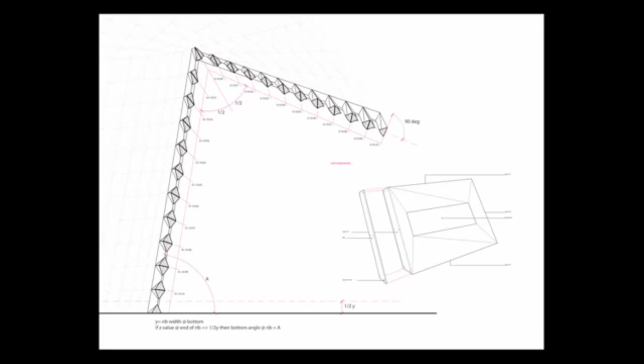So it was a back and forth between an existing curve given through the mathematical equation, as much as a feedback loop between what the material properties were, and what the physicality — the minimal scaling of the brick — allowed us to do. Then much effort went into the actual engineering of the brick.

We wanted, for aesthetic reasons, a minimization of the seams, but also for technical reasons, because all of those had to be glued. In the end, it was also about saving material and money, as these bricks could be laid out in the most efficient way on a chipboard, which could still be cut with the facilities given at the GSD.

So then much effort went into labeling and numbering them, since all of them were different.

In the end, we were really wondering how far this continuous differentiation was actually helping us, or whether it makes any sense at all, by the way.

But for the sake of working it through, here you see how we laid them together. There would be a chipboard connecting piece going through the vertical seams you're seeing — that's also why you still have that little hole on the right side of the brick, which was a piece we filled in after tying them together to the vertical piece.

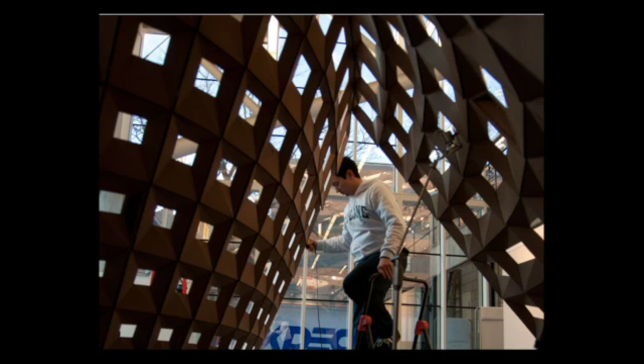Here the construction is under way, and maybe a quick thing to give you a feeling for the overall scope of the work.

Okay, and now we're coming to something Will and I quickly worked on. The animation was also by Will Choi — thank you, Will. So this one takes it a step further.

How could we bring this project from this hyper-theoretical or exploratory realm, where it was really about the challenge of customizing the brick units made out of chipboard, into something in feedback with real data, or at least some assumptions thereof.

So the question was how we could look at the apertures and the geometry again, putting it into a direct feedback loop with ideas of shading the sun for different time periods throughout the year, or for different locations. So what you see is essentially a flexing of the apertures linked to the sun angle at different locations.

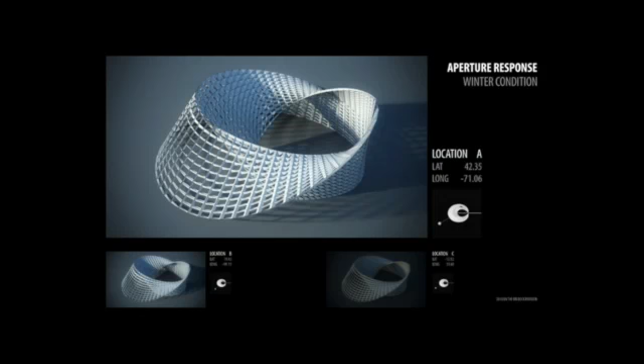And there's a close-up coming, which I think makes it even clearer. On the right side, you can see how the sun changes in respect to the building.

So the question would be, would we mechanize those openings? Most likely not, knowing the centre, the Institut du Monde Arabe in Paris, France. I'd say we're not going to mechanize them, but one could look at different sun shades. Again, this is only working through a model rather than an actual project, but one could define the apertures in order to allow sun to come in throughout the winter times, and then prohibit it because of the location of the aperture.

Also, the brick is always considered as having two fronts, a back and a front, and by relocating the apertures in space, you could allow sun to come in at certain moments and then deny it at others, in close correlation with the angle of the sun.

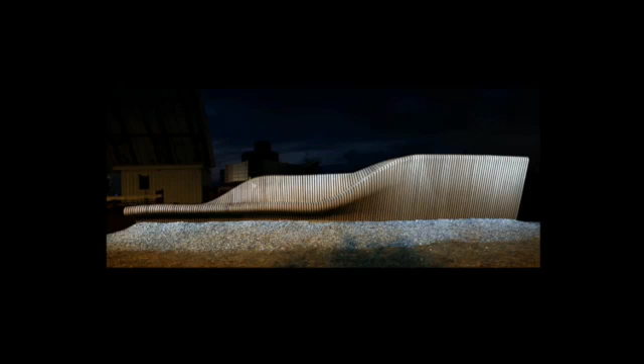The idea was to develop a piece of furniture. There's something highly annoying - I don't know if you're aware, but there's a huge business out there because these are used for advertisement furniture these days. J.C. Decaux is one of the wealthiest men in France because he is populating our cityscapes with advertising surfaces linked to street furniture. If you think about where you were sitting most recently, there's a park bench, and it has some style that whatever mayor at some moment in time thought would be best suitable for the city.

Anyhow, this is not suggesting a new style, but an alternative understanding of how one could think about these types of furniture. We thought of them as a family. This comes back to the idea of versioning and the question of how one can think of it not as a unique design object, but rather as a principle of operation, which can then be actualized as it goes onto certain sites, or as it has different functional requirements.

So we thought about it as a vertical element for advertisement, which could also be educational information. A box element could be trash, could be a bar, could be a flower bucket, mailbox, regular sofa, bench, could be converted into a bed, probably a stool. Essentially it was made to follow all of those different criteria. On the right side, behind it, there's a bigger vertical element hidden - the front leans more towards becoming a bench or bed.

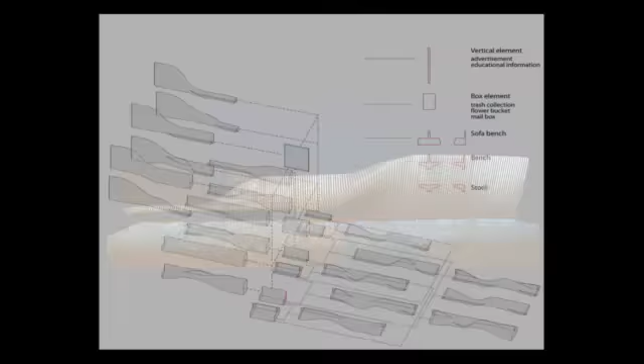So here you can see each of the sections could also be considered a version of its neighbor, because the way it works through is coherent. You see the rods which are connecting it. The material is recycled plywood, which is watertight. This is the bench - it's been used in very different ways than we imagined, but people had a lot of fun with it.

Now I'm going to talk about something that has to do with Hong Kong - our work is generally centered in Hong Kong. It gives us the urban intensity we like to work with. This one was also a Biennale piece, this time the Venice Biennale in 2010, where we exhibited the piece called Serial Architecture Systems of Multiplicities.

Here we rethought the quotidian architecture in Hong Kong. Hong Kong is a city with an average density of over 6,300 people per square kilometer. It's one of the most compact cities in the world, a diverse and complex place with acute physical constraints that have created an extreme form of urbanism, which also inspired our response to it.

So here we see the urbanism - it's all limited on one strip. This is more the inner of it. Here we see a very typical tower floor plan, which developers would multiply, and here we see the result of it: an incredible monotony, which they then try to soften a little through different colors across these towers.

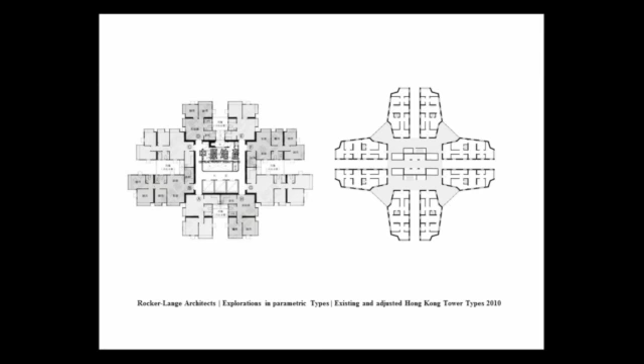So, and that's what we started with, and we developed a parametric model. It's again Grasshopper, because that's what we can work easily with. And we set up a set of criteria, certain height, obviously, but then also a flexing within the model, which allowed us to create differentiation.

Now, I'm running you quickly through matrices. And again, this is a method. It's not to be taken as the actual piece of architecture, or that this would be our new urbanism. This is really a model of operation, a model of thinking. So here's matrix 1. You can see they come from very straight to totally erratic. Left is rather calm. Lower right is always probably most erratic.

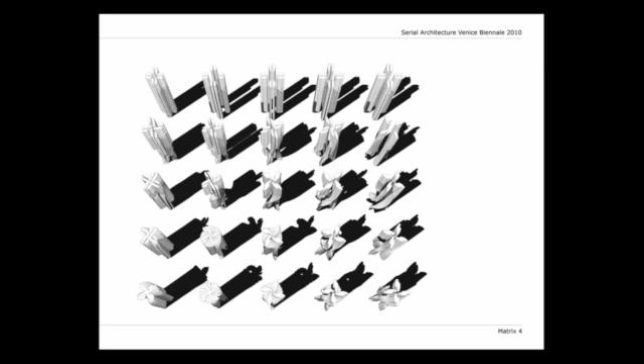So we worked with different parameters, looking at different sizes of the apartments, looking at different exposures to light, but also looking at obviously still some structural concerns we had.

Here we have, by the way, the process was automated. So I wanted first to bring in a 450-page book. I had a fantastic student, Wes Thomas is his name. He automated the overall process. So this book was literally automated in terms of its representation of the matrices, but also particularly here, these towers. Each floor plate was laid out like this.

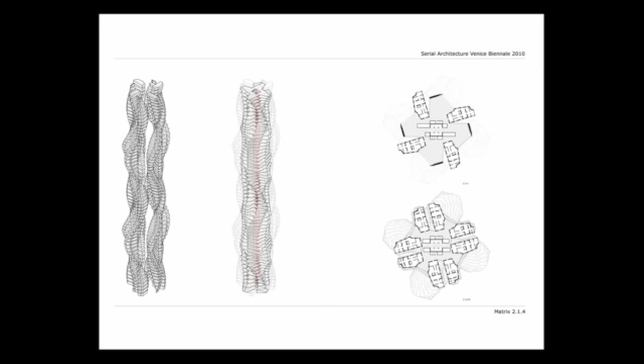And then here you can get a feeling for how the units are rotated towards one another, creating some outdoor space if one wished to from one level to the other. You can see also how ridiculous the project turned, where on the top floor plan you can see one unit simply was reduced to its load-bearing wall.

As parametrics works, you can set up the parameters unto where effects occur, right? First, left side, nothing. I think then 1/3, 2/3 full impact.

And then those are the elevations. If you look at the array of what we have created, the different matrices, we would have now these elevations. Obviously, they're commentary on the monotony I've shown you before. I'm not sure they escape that monotony at all. I think they just create another type, a little more erratic.

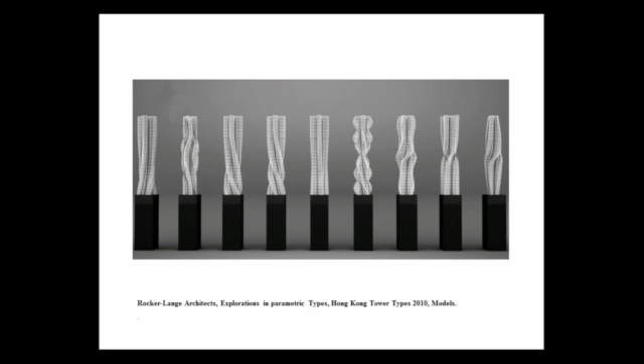So obviously, the way I'm treating this, you may already hear from my commentary, is this is a search for something what this idea of versioning could bring to us, but it's also a kind of self-critical search. It's ironic. It's also critical of parametricism and the fetishization of continuous differentiation to a certain extent. I don't think it has produced yet something which I would like to put forward as a serious project of architecture, which I would be happy to have built tomorrow. But that is, I hope, not too far in the future.

Now we're looking at the absence of proper public space. There is a lot of space, but it's not really public any longer. It becomes interiorized. It's kind of mall systems. And yet it's highly interesting because it happens on different levels.

Hong Kong is a city which develops vertically very interestingly, partially because of the terrain itself, but also because of the high density. So those are diagrams which stem from a book which just analyzed Hong Kong's dense urbanism, and I'm just using them as a springboard. We have differently done diagrams as well ourselves, but I didn't have them ready at hand today.

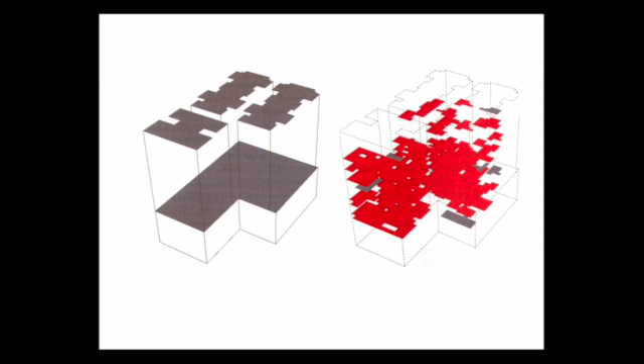So this is a shopping mall which is ad hoc created within an apartment building, within an office building. And so here the public space in red takes over that which was before private and a private interior, if you want. And it becomes kind of shanty, small scale, almost like a market-like situation.

And then here we have suddenly an entry level, I think it was 17 floors above where the actual lobby space is.

So those are the conditions we were interested in, we would like to further develop, but to radicalize the idea of having public space on vertical levels. So for that, again, we set up to develop a matrix, and we started out this time with some type of typology. On the left side, you see urban typologies, existing typologies, which we then started to develop to different degrees of how we wanted to integrate urban space.

You can see on the left there's nothing, it's like the typical extrusion. And then we kind of worked in successively, more so on the right, to the maximum extent, public space, which we could imagine happening on almost every floor.

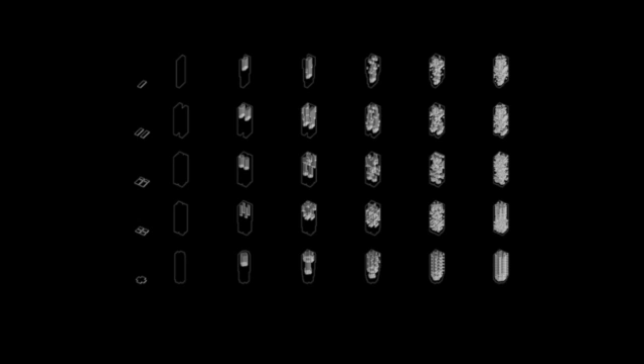Then we linked this also to a development of the core and the escape stairs. Those thinner, erratic nervous systems are the escape stairs, and the other ones are the disjunct cores. Those are the newly developing public spaces.

Those are the models currently on display. Okay, and I leave you with this to be read by yourself.

I hope you finished, or should I read this? Mark, you give me some signs I don't understand. While you keep reading, why don't we ask the speakers to begin sitting down? We're running slightly behind time, so why don't you, maybe, can we have the lights a little bit more? Thank you.